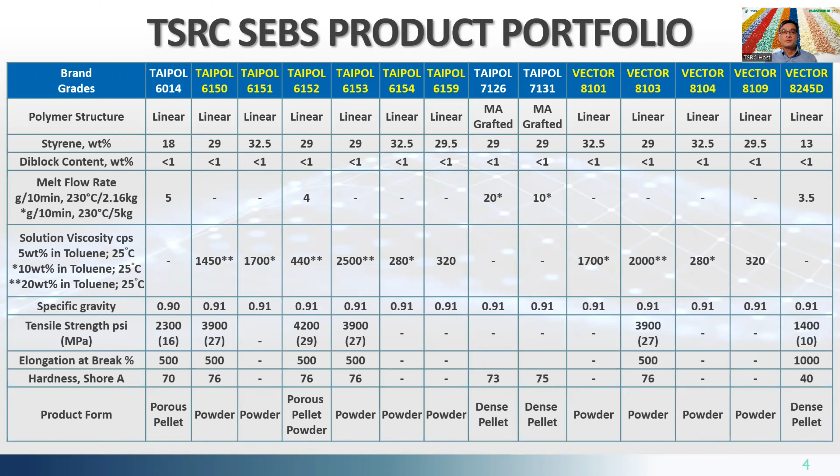Generally, we could see SEBS structure from 3 dimensions: molecular weight, styrene content, and vinyl content. Based on the product design, we could provide various product series with different performance.

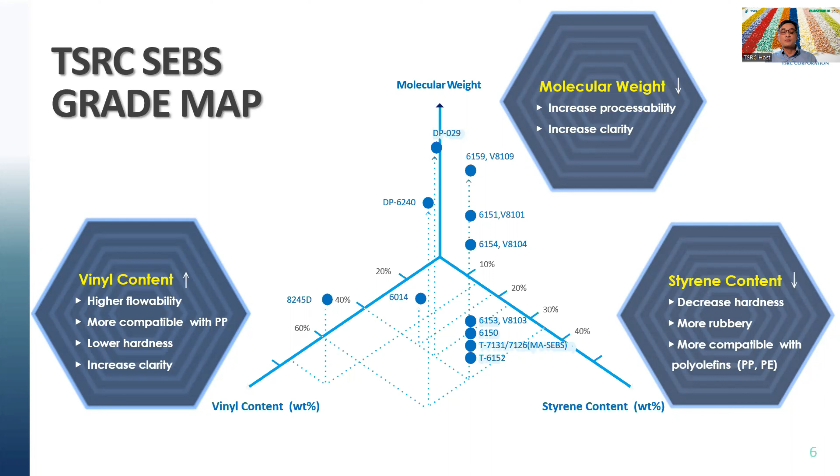Next, we are going to introduce high flow, oil-free and low hardness grades, SEBS 6014 and 8245D. 8245D is also a medical grade.

SEBS 6014 is a high flow and low styrene SEBS with 18% polystyrene content. High flow design means it could combine strength and elasticity with the ability to process directly with or without additives.

It could also compound with a variety of ingredients like polyolefin, polystyrene, and other elastomers to adjust the properties. Also, it is suitable for processing by casting, injection molding, or other processes requiring easy flow.

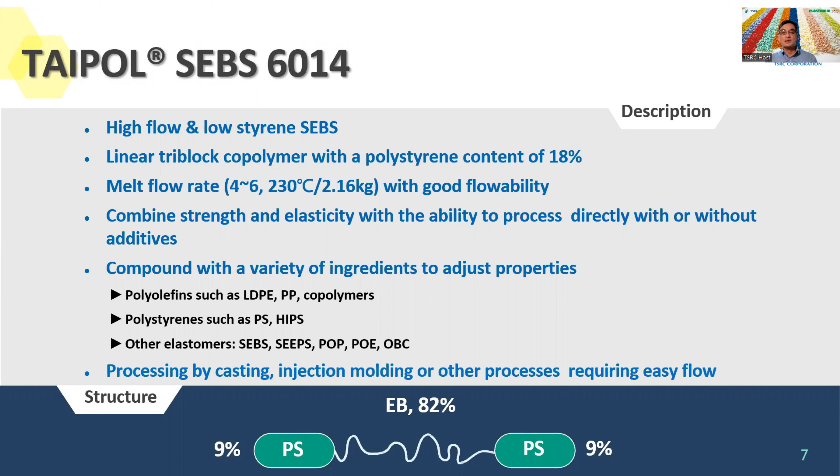Comparing to other low molecular weight grades, 6014 is softer and high flow. Softer means more degree of freedom to adjust the hardness design.

In the formulation, this means less oil migration risk. Higher flow means easier processing with less energy consumption and carbon dioxide emission.

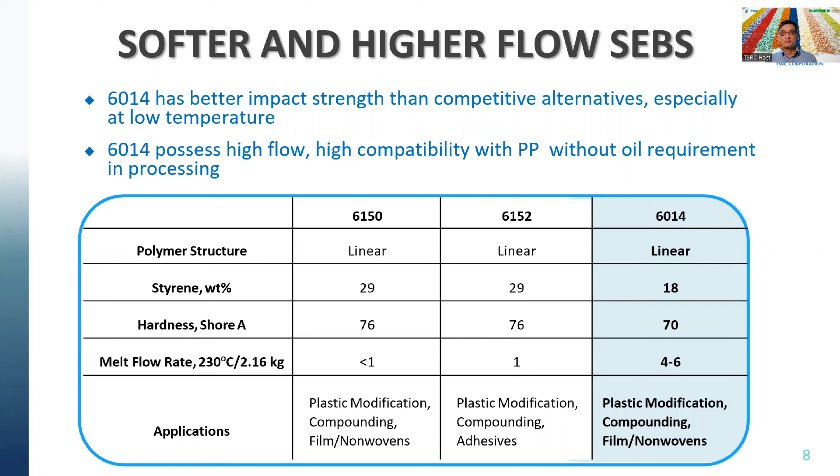Based on 6014's structural design, applications could cover sporting, adhesive and sealant, and automotive, which need high flow, oil-free, and elasticity properties.

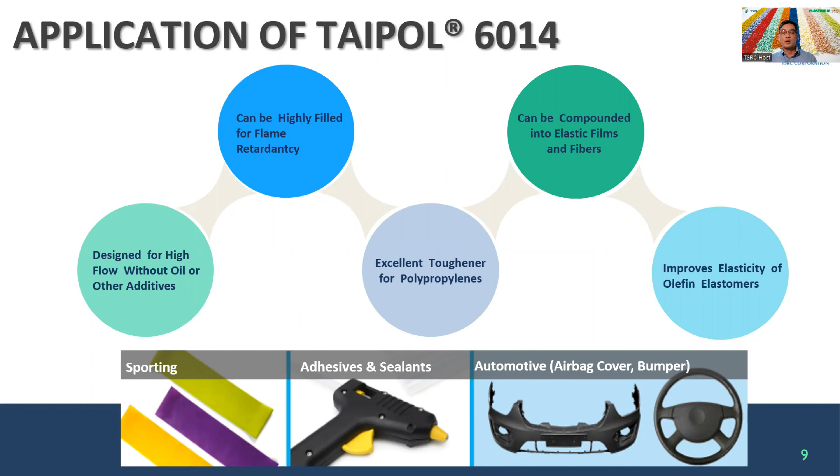In this page, we move to SEBS 8245D. 8245D is a high vinyl and low styrene SEBS. Based on the structural design, it could reach high flow, low hardness, and better compatibility with polyolefin.

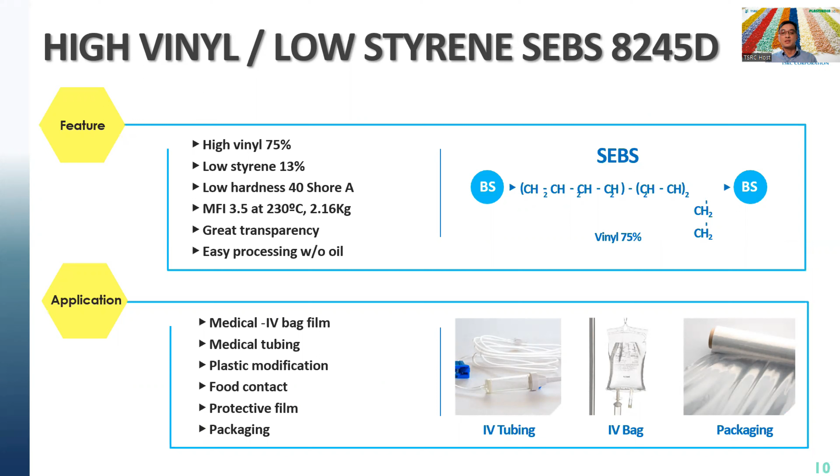Because of high flow and low hardness, it has good processability without oil and is suitable for medical and food contact, and shows high transparency when compounded with polypropylene without oil migration risk.

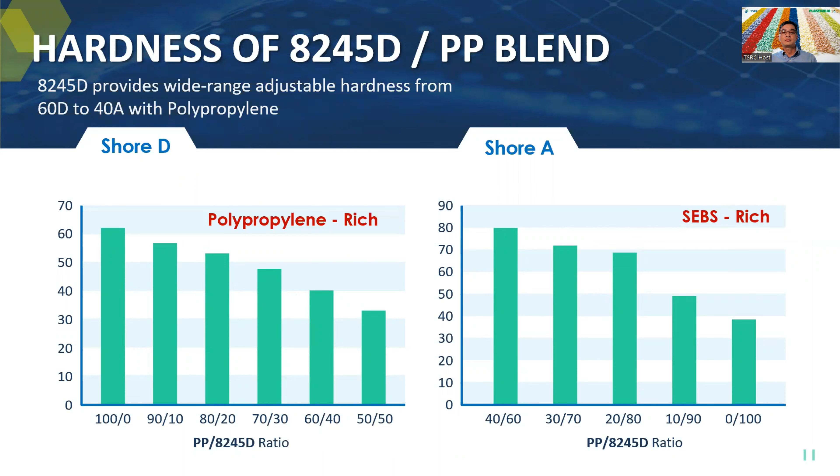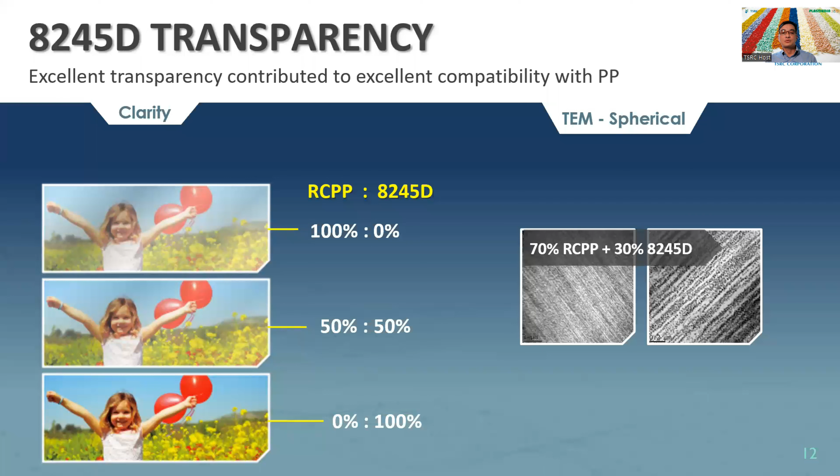When compounded with polypropylene, 8245D provides a wide range of adjustable hardness from 60D to 40A. Because of 8245D's high vinyl structural design, it can show excellent transparency, contributing to excellent compatibility with polypropylene.

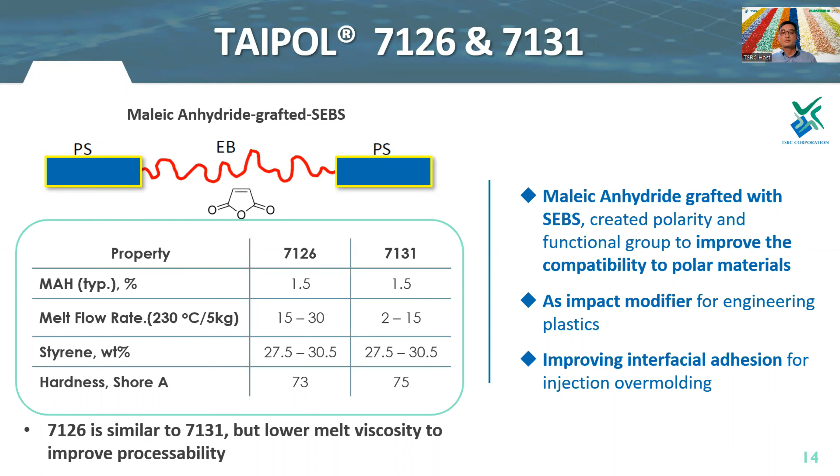This page shows you the mechanism of improving compatibility to engineering plastics. The main components of SEBS-based TPE compound is SEBS, polypropylene, and oil.

Basically, it is a combination of non-polar material. Therefore, it could be overmolded to polypropylene directly. However, when you are going to overmold it with polar substrate, such as polyamide or ABS, you need to functionalize

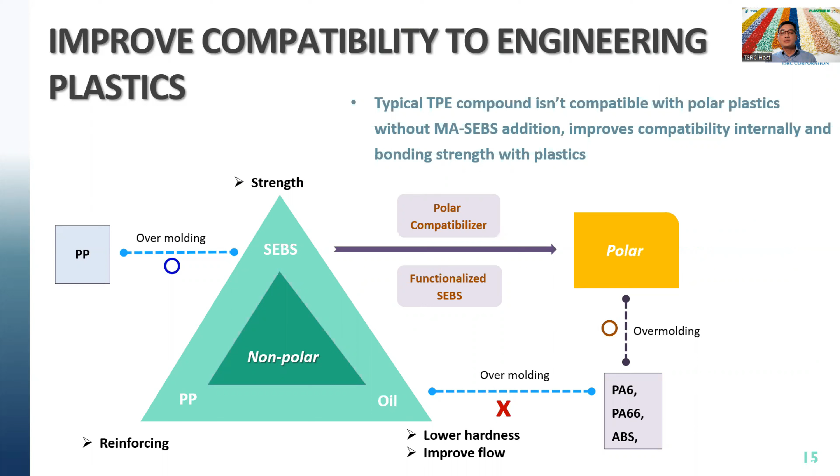the SEBS as polar compatibilizer to enhance the peeling strength. This page, we decided to experiment by various composition percentage of Maleic anhydride graft SEBS to evaluate the impact strength of polyamide 6. From the chart, after added Maleic anhydride graft SEBS, we could see Maleic anhydride graft SEBS have good performance to increase impact strength.

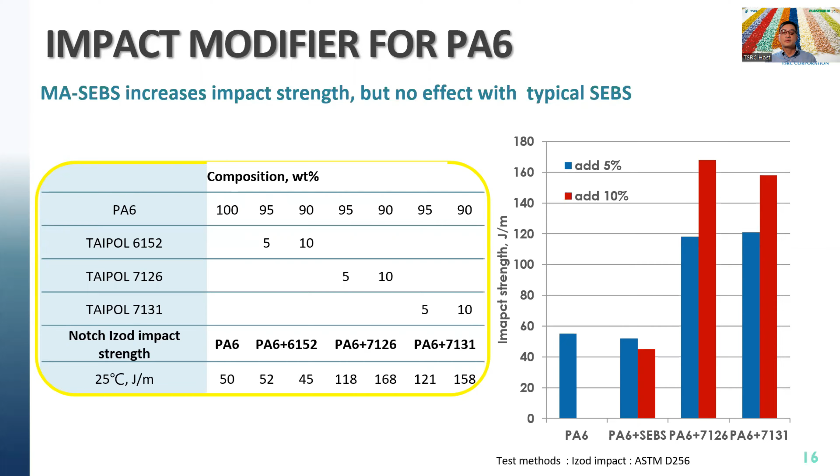In this page, we are talking about how Maleic anhydride graft SEBS to compound for overmolding by different substrate. From this table, we can see 7126 and 7131 are suitable to both of polyamide and ABS overmolding. This chart is based on 10% dosage to evaluate the peeling strength. We can see peeling strength is improved after adding 7126 and 7131.

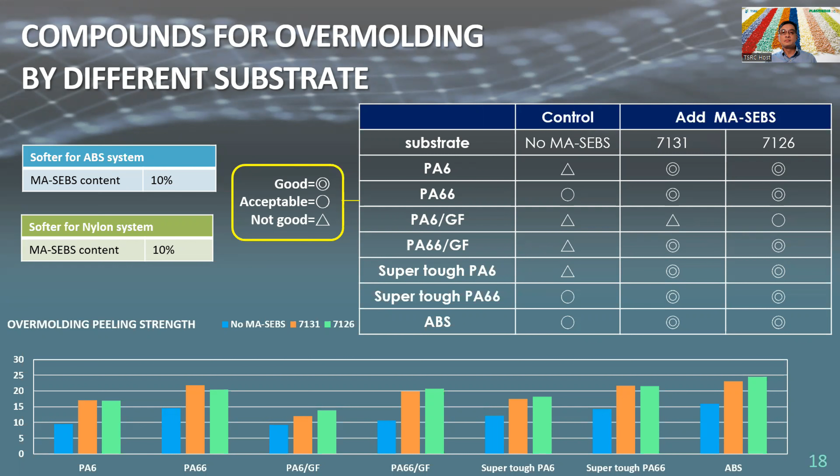Next, we are going to introduce another high vinyl SEBS grade, DP6240. DP6240 is a high vinyl SEBS with high flow. Compared to general SEBS, it could add less oil to achieve good flowability for processing and lower hardness to reduce the risk of oil migration.

Also, high vinyl structure could contribute to better transparency when compounded with polypropylene. It is suitable for wire cable, plastic modification, and general compounding.

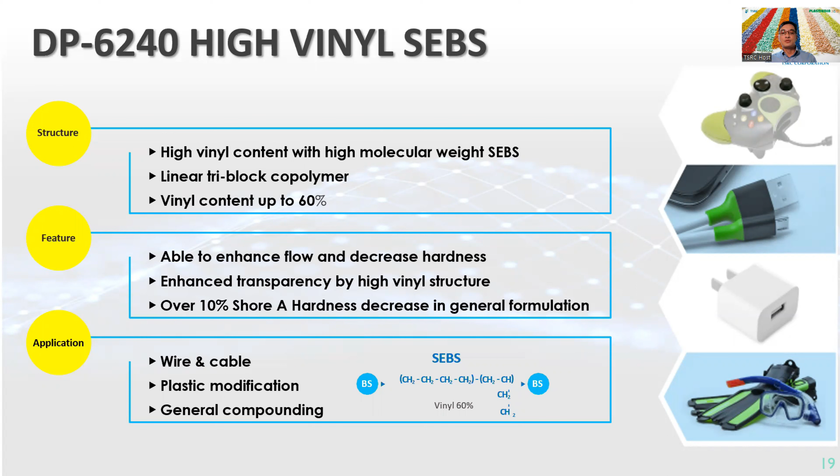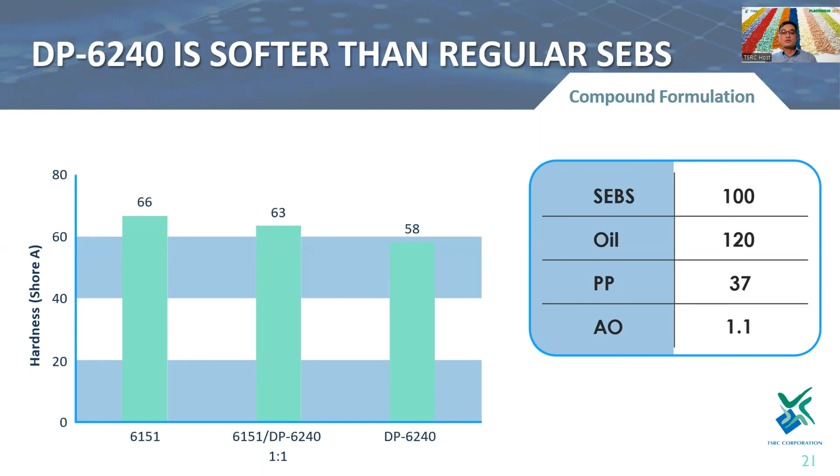Based on the same formulation, you can see the hardness of DP6240 is 12% lower than 6151. That means you could achieve the same hardness with less oil. It could be used in a form of application which are sensitive to oil migration.

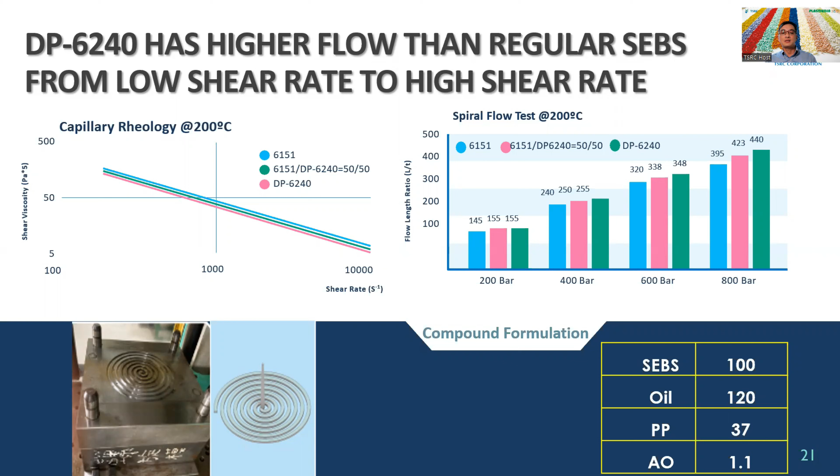From this chart, you can see DP6240 has higher flow than general SEBS from low shear rate to high shear rate based on the spiral flow test and lower shear viscosity from capillary rheology chart. Higher flow means easy for processing with lower energy consumption and carbon dioxide emission.

About the value proposition of DP6240 comparing to general SEBS, it could provide better flow, better transparency, and a lower hardness. Also, it shows smoother surface and less flow marks in injection molded parts because of better flowability.

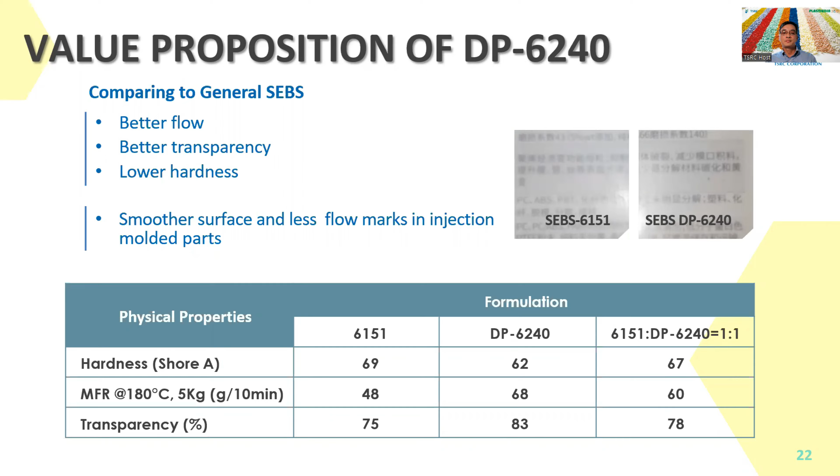About application of DP6240, it is suitable for following three types: better flowability for high flow injection molding components like thin wall, complex, and large part of injection molding. Softer and delicate touch, like less oil to the same hardness. Low oil extrusion molding, such as wire cable and general extrusion molding.

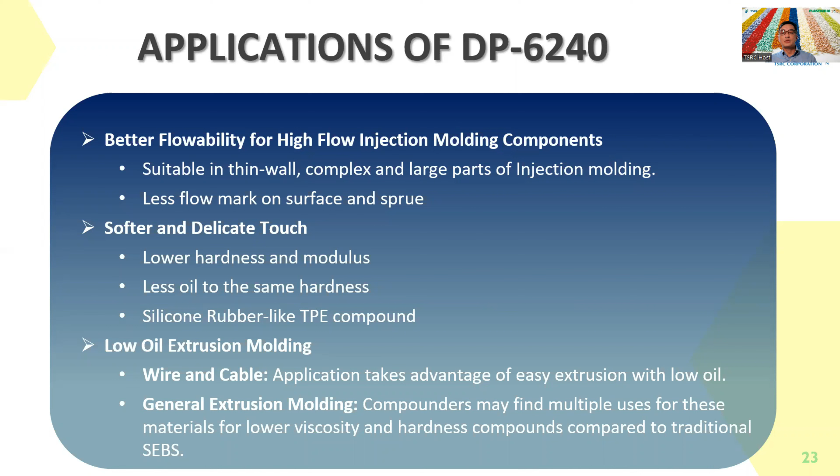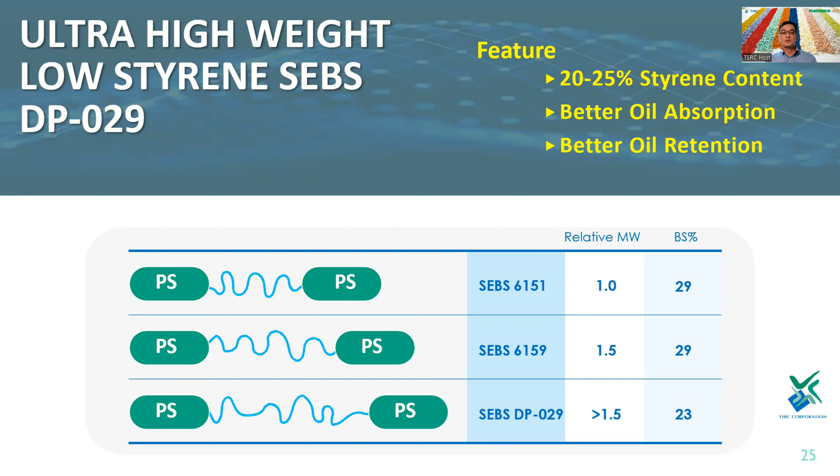Next is ultra high molecular weight SEBS DP029. DP029 is based on 6159 to redesign styrene content for achieving better oil absorption and oil retention. Except the better oil absorption and oil retention, DP029's compression set is also better than 6151 because of ultra high molecular weight design. Longer EB block design contributes to better rebound resilience compared to 6151 and 6159.

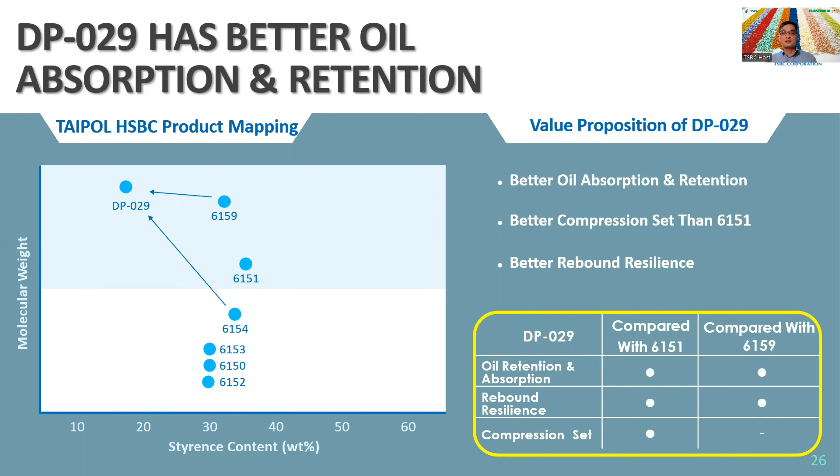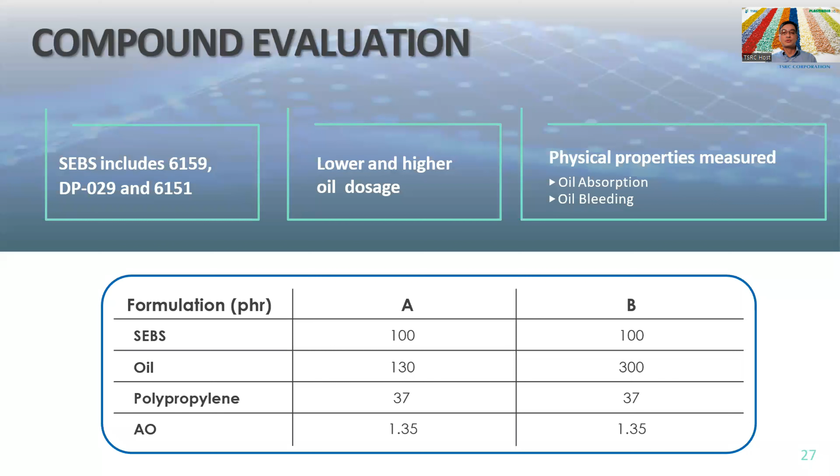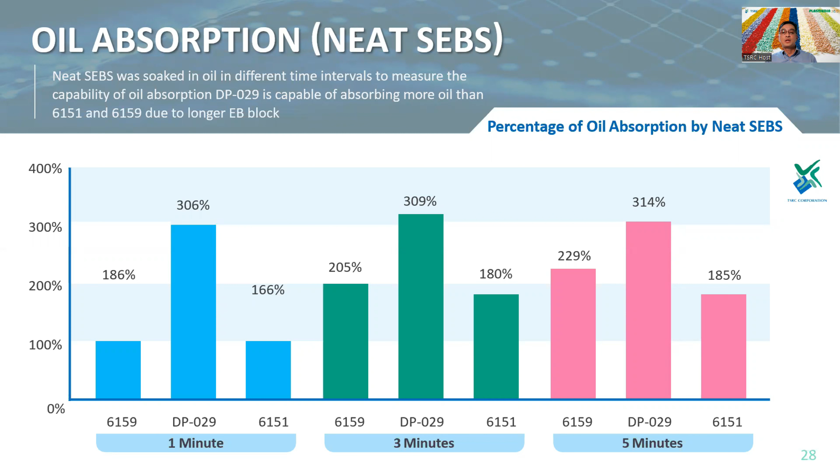From this page, we designed two compound formulations including lower and higher oil dosage to compare oil absorption and oil bleeding. In this page, it shows neat SEBS was soaked in oil in different time intervals to measure the capability of oil absorption. DP029 is capable of absorbing more oil than 6151 and 6159 due to longer EB block.

This page, we can see the evaluation of oil bleeding out in low oil content and high oil content. In low oil content, the differences of oil bleeding is not obvious. In high oil content, DP029 has less oil bleeding, which means better oil retention with DP029 due to longer EB block.

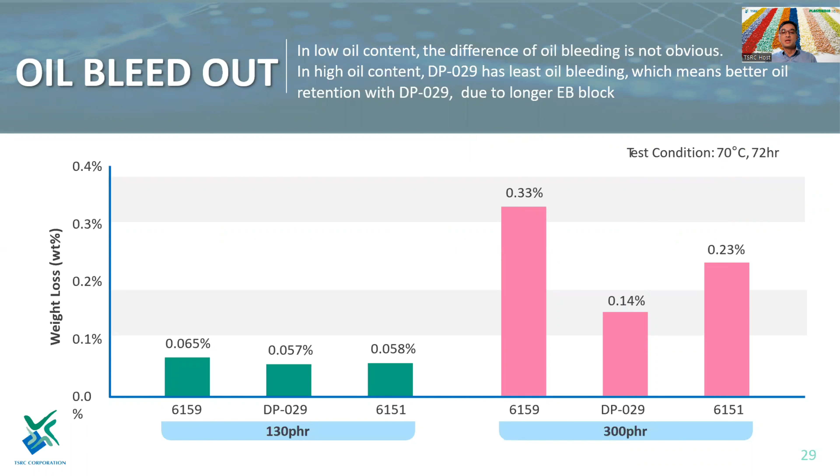After going through TSRC's new developing product, we are going to next about application, and today we are going to introduce automotive and medical. The trend of material in automotive industry are eco-friendly to reduce waste, energy saving to reduce carbon dioxide emission, and low contamination to reduce fossil fuel consumption.

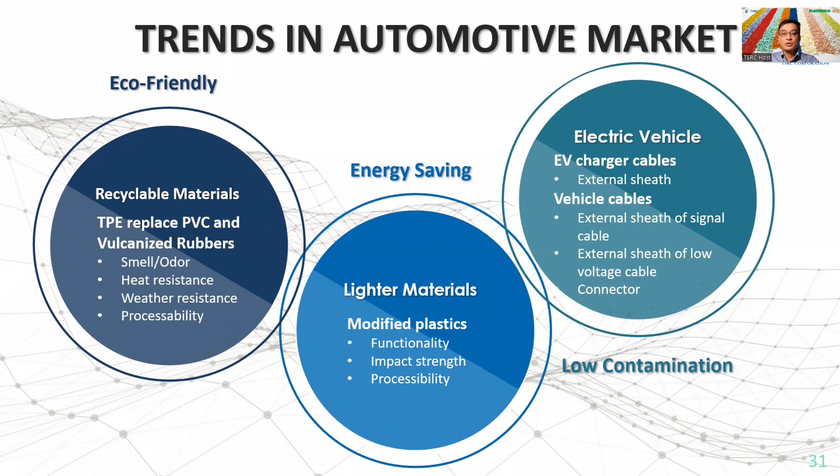For eco-friendly, we use more recyclable material to replace vulcanized rubber and thermoset plastics. For energy consumption, we use more light material like high-performance plastics to replace metal. For low contamination, electrical vehicle is chosen by global car makers.

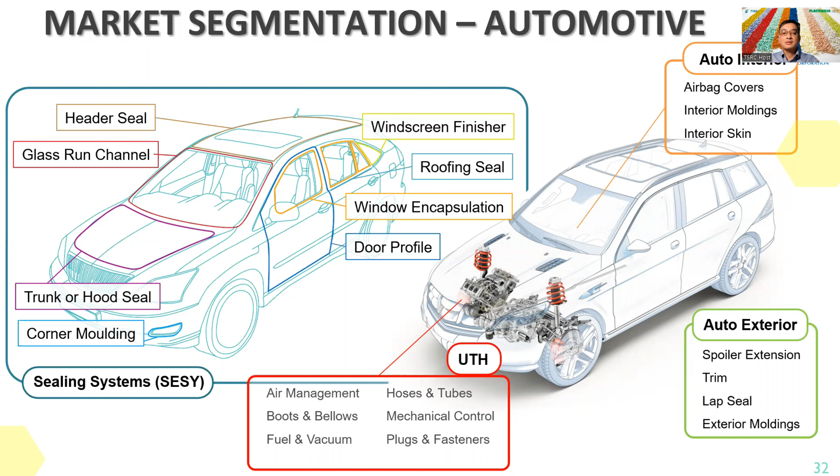SEBS-based TPE compounds are commonly used in interior and exterior parts, from sealing system, trim bumper, to airbag cover, interior skin and mats. For exterior parts, they need good heat and weather resistance. For interior parts, they need to pass VOC and haze test.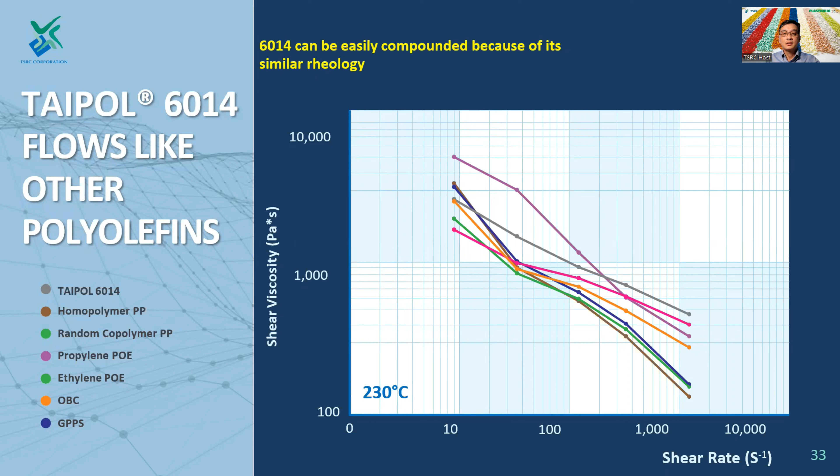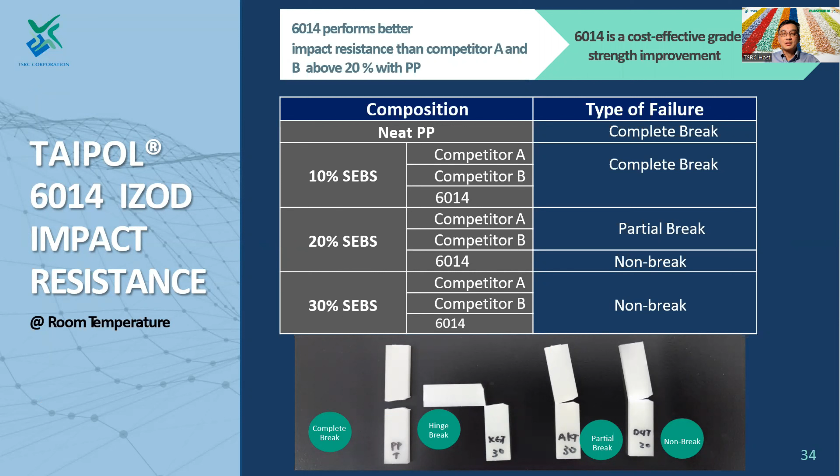In this page, we first evaluate the impact strength after testing different impact modifiers. Basically, 6014 could provide excellent impact strength improvement by 20% at room temperature. From this chart, you can see 6014 could greatly increase toughness of polypropylene from room temperature to minus 40 degrees C.

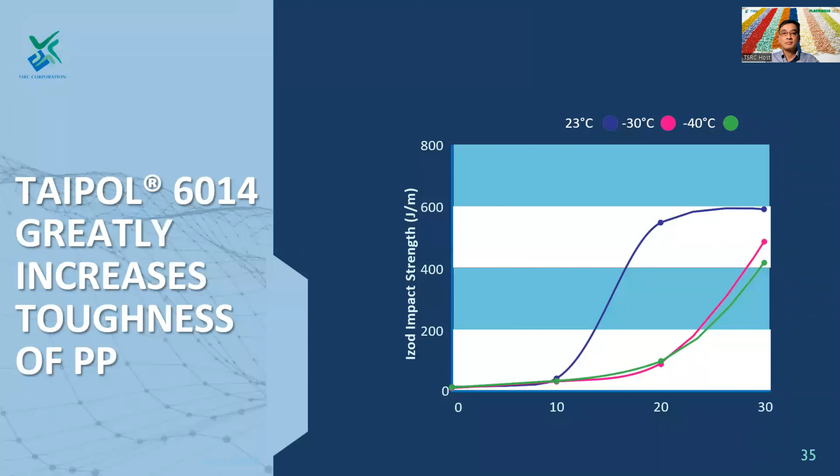Sealing system is another important application of SEBS. Static sealing systems such as trim seal require less compression set, but more aesthetic quality, so SEBS is used more in this application. Dynamic sealing systems such as door seal and glass run require more compression set and durability, in which TPV and EPDM deliver better performance than SEBS. However, certain compounders are competent to overcome this shortcoming by fine-tuning the formulation with the use of SEBS.

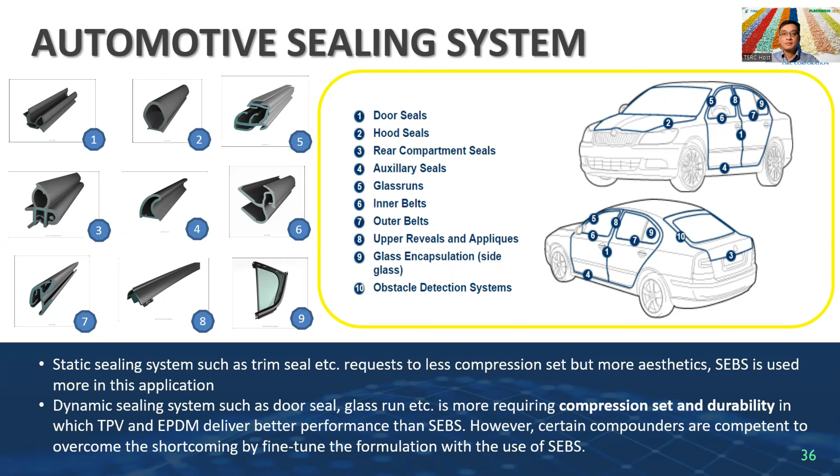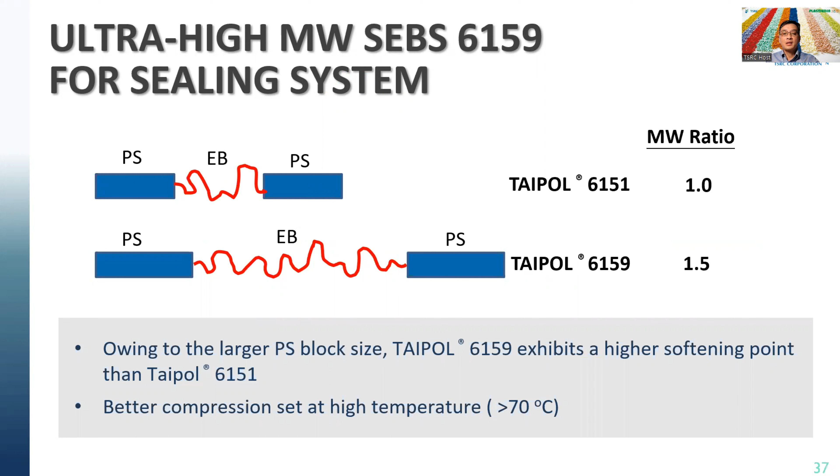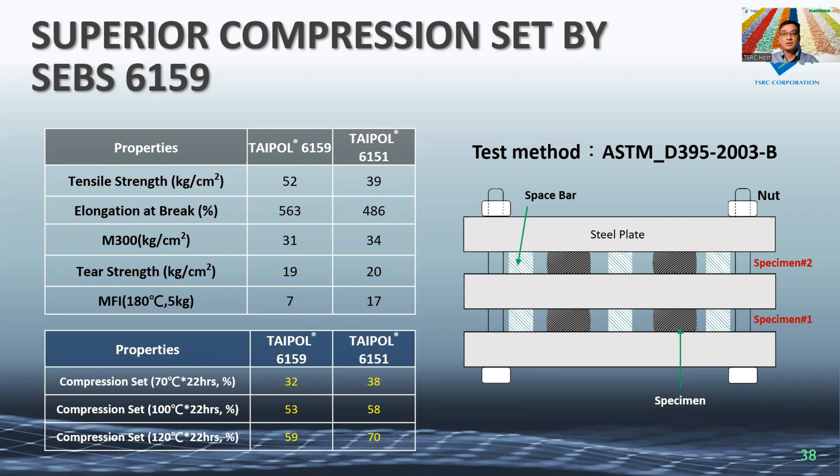6159 is our major solution for sealing systems. Owing to the large polystyrene block size, 6159 exhibits a higher softening point than 6151, and better compression set at high temperature. From this table, you can see 6159 could provide superior compression set compared to 6151 from 70 degrees C, to 100 degrees C, to 120 degrees C.

As previously mentioned, SEBS plays an important role to offer performance and eco-friendliness. Comparing to TPV and EPDM, 6159 could provide low VOCs, better touch feeling, and lightweight.

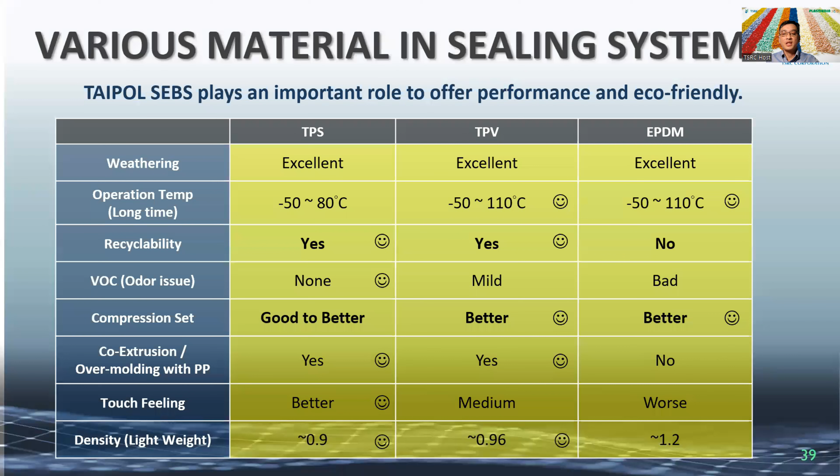Next, we are going through Vector SEBS for medical applications. Comparing to other applications, medical products need to follow more regulation, and compliance depends on their applications. Therefore, TSRC developed the Vector A series SEBS for medical application. They not only meet high quality standards, but also satisfy ISO 10993-5 and USP Class 6.

SEBS in medical is focusing on medical packaging like IV bags, polypropylene closures, syringe plunger tips, and medical devices such as surgical straps, IV tubing, and masks.

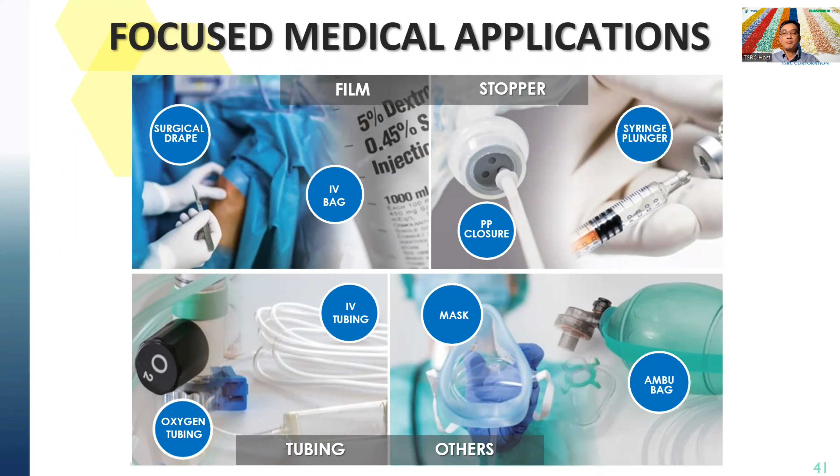For Vector SEBS, we have high vinyl type 8245D for IV bag, IV tubing, and other oil-free applications which require high transparency. 8101, 8103, 8104, and 8109 are normal vinyl grades for general compounding and plastic modification, such as medical stopper, syringe, plunger tip, and polypropylene closure.

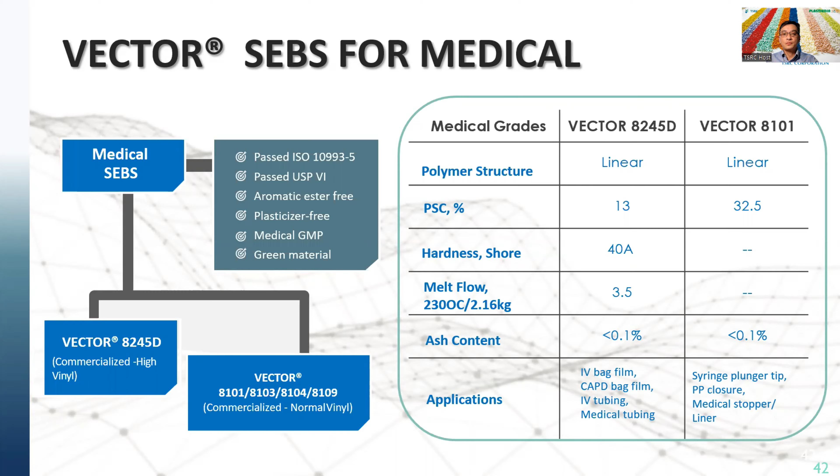As previously mentioned, 8245D has good compatibility with polypropylene. Therefore, it could be compounded with polypropylene at various dosages to provide a range of hardness for IV tubing, device tubing, oxygen, or CAPD tubing applications.

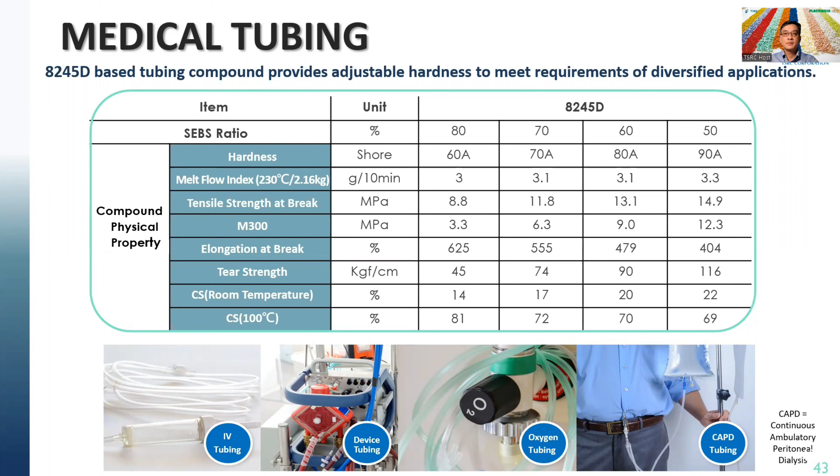8245D is also suitable for polypropylene-based IV bags to provide excellent flexibility and a high degree of clarity.

This page shows an example of a 3-layer co-extruded IV bag film. Generally, the thickness of the 3-layer co-extruded IV bag film is 200 micrometers. Based on the purpose, it could add different dosages of 8245D to contribute to various functions of these 3 layers. The middle layer is the thickest, providing flexibility and transparency, and needs the most 8245D dosage, around 30%.

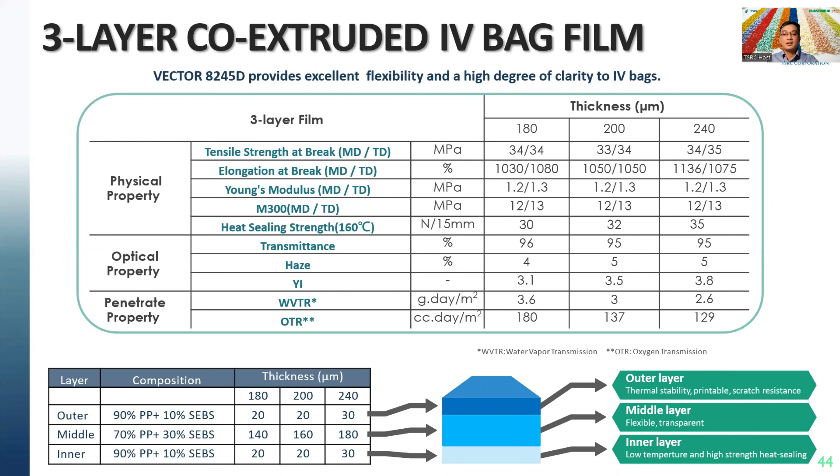For the outer layer and inner layer, the suggested dosage is 10%, but it still depends on the formulation design. This is an example for plastic modification with various oil content to improve impact strength under different hardness and TPE compounding, just for your reference.

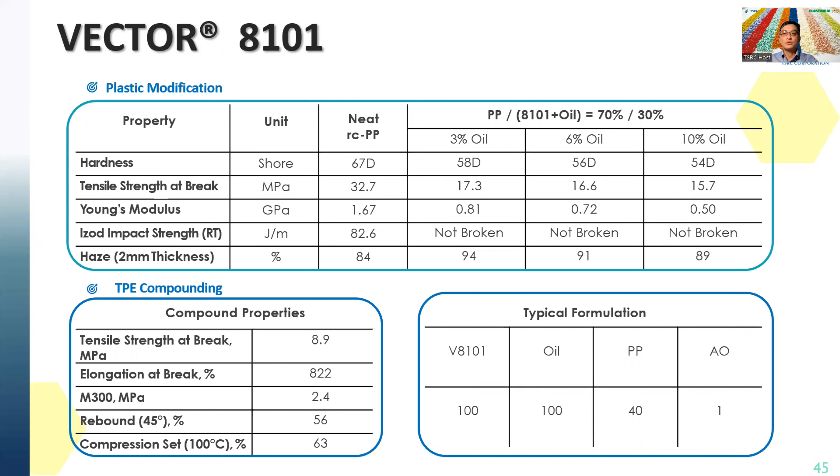SEBS 6159, DP6240, DP029 for high-performance applications such as automotive and other industry applications. Maleic anhydride graft SEBS 6126 and 6131 have good compatibility with engineering plastics to enhance impact strength and overmolding with polar substrates.

Because the market always needs new materials for product development, TSRC will keep developing new environmentally friendly products to fit their demand, especially under the trends of sustainability and recyclability for reducing impact to the earth.